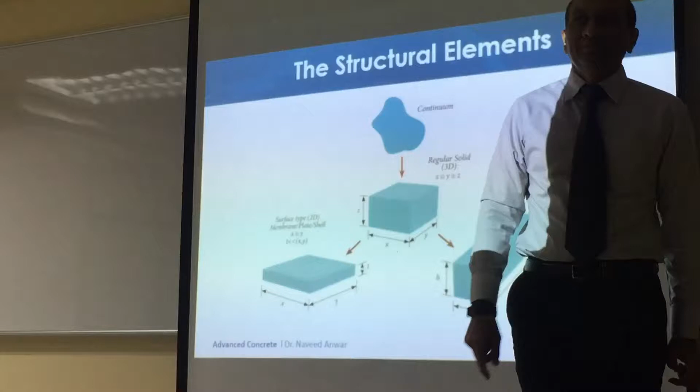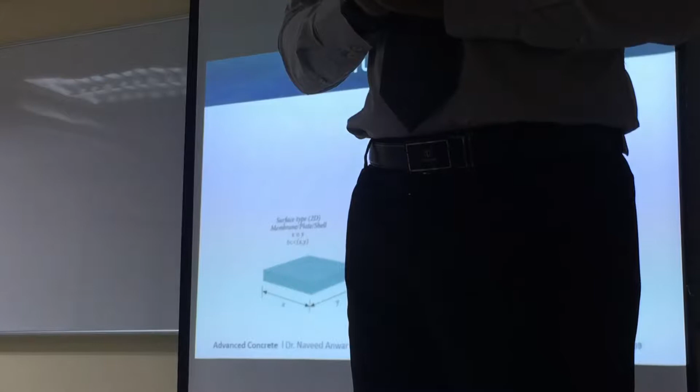What is a continuum? I am not going to teach English in this course, right?

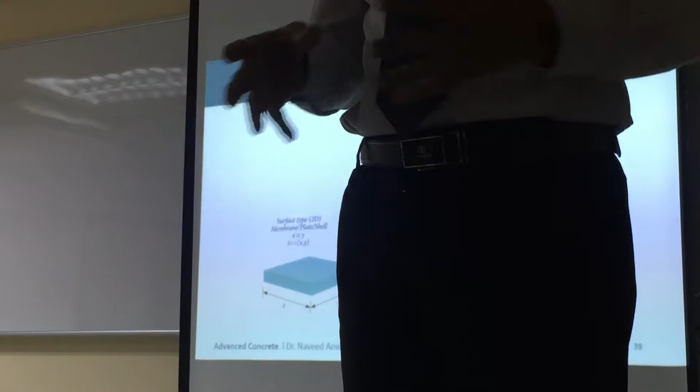Continuum means something that never ends. It just goes in all directions forever, in space and in time. Things that Einstein liked, right? Things that are continuous and they never end, both in time and space.

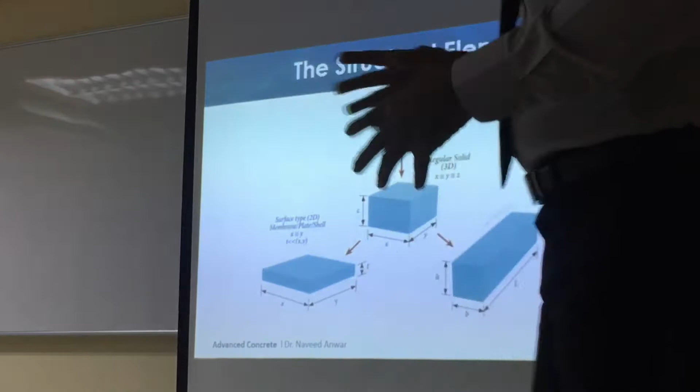So if there's a continuum, we are part of a continuum. We are all part of a big time and space continuum. There is no distinction between space and time. We have learned it's all part of the same thing. Energy, matter is the same thing, right?

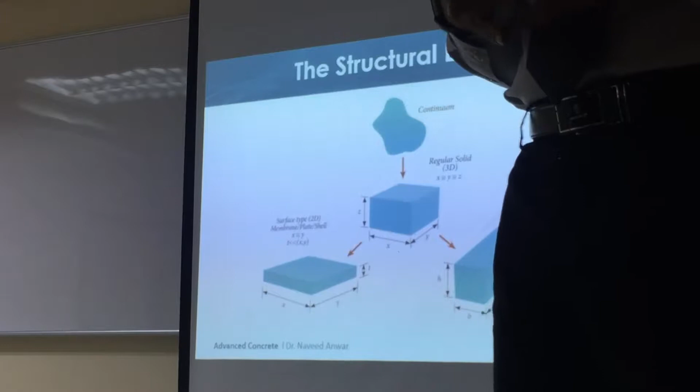So you're just part of that. Everything is part of that. But if we break that down and take out a solid, regular piece out of that continuum, physical, at one instant of time, and then we say, okay, this is a solid that I'm going to deal with.

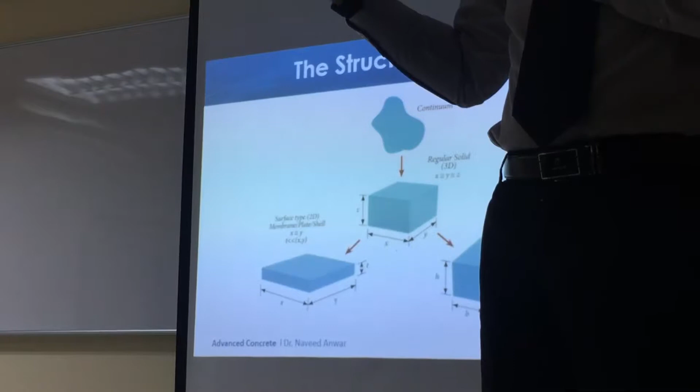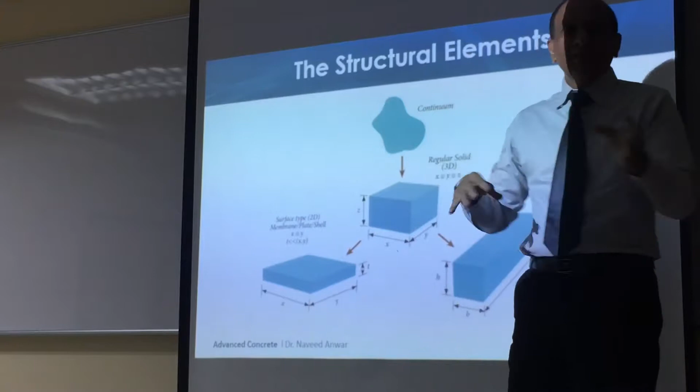This is a block of ice or block of something that you take out. That block of wood or ice or concrete, whatever you take, it's a solid taken out from a continuum at a particular time. And you say, okay, I'm going to assign 3 dimensions to that, z, x and y. Doesn't matter, x, y and z, 3 dimensions to this one.

And then if I say that all 3, x, y and z are nearly the same order, then I'm going to call it a solid.

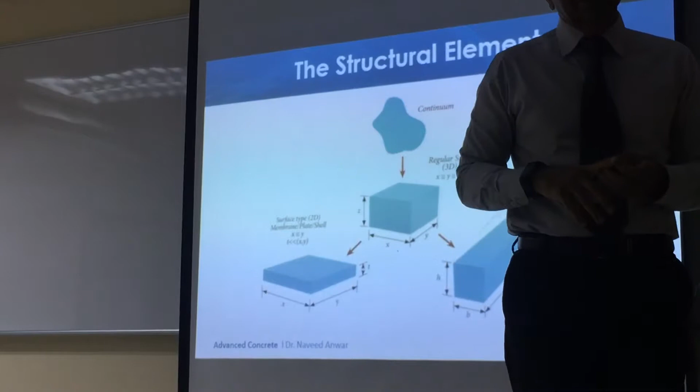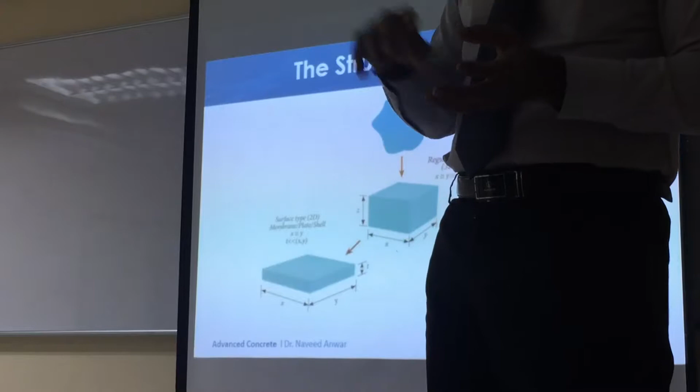And the theories that govern solids are different from other theories that we will talk about, right? So there's a whole field called solid mechanics that we don't teach in AIT anymore. I used to study it, my professor was very, very tough at that time. I hardly passed that course. Very tough course, solid mechanics, because it dealt with continuums.

Now we don't teach it because of the computers. We think that knowledge is not so essential anymore, right? So we don't teach that. Many universities don't teach that course anymore.

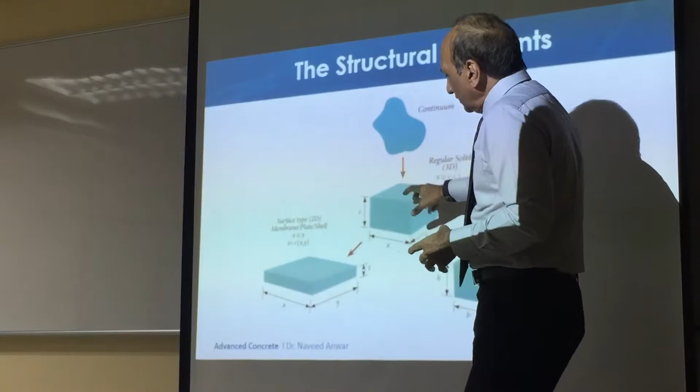So solid mechanics, or solid, then if you go to this side and you say that one of the 3 dimensions is much smaller than the other 2 dimensions, we can call this a surface type or 2D object. This is 3D because all 3 dimensions are important. Here it's called 2D because 2 dimensions are important. The 3rd dimension is very small, so we can convert that into a property called thickness.

And then whether that thickness is 1 centimeter or 5 centimeters, it doesn't matter, it is still surface. This computer is called Surface, you know. Microsoft came up with a very nice name for this one. I really like it, they call it Surface. So because its thickness is so small compared to the other dimensions, they call it surface. And that's what we're saying, surface type 2D object, right?

When the thickness is much smaller than the other 2, how much smaller? We don't know. It's a big debate. What does it mean? Relative, but what does it mean, how much smaller? 5 times, 2 times, 3 times, 4 times? We can discuss a lot on this one. We will discuss this later.

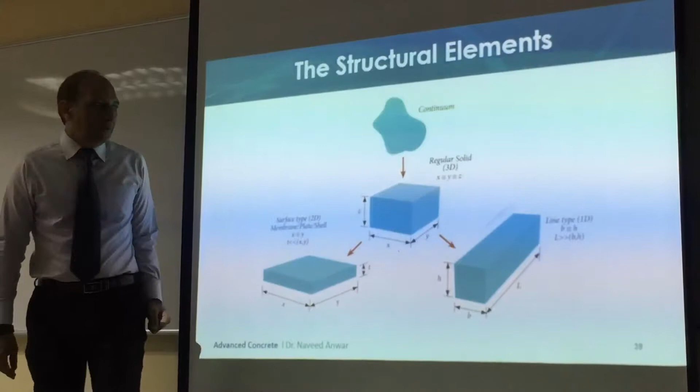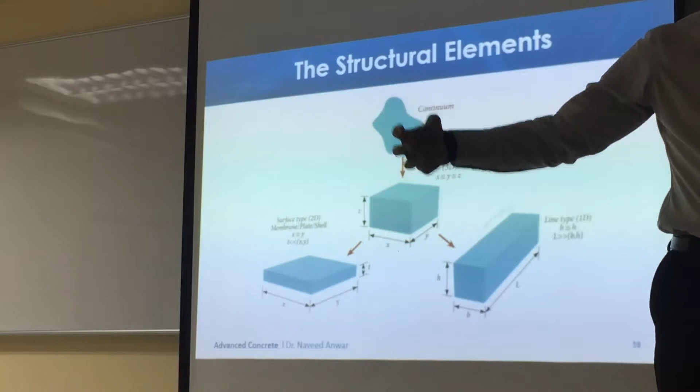But let's assume that this is one type where thickness is much smaller than the other 2. So this is one surface type. On the other side, if we say that 2 of the dimensions are much smaller than 1 dimension, then we come to the bar type, line type. And this is what is our main topic for this course.

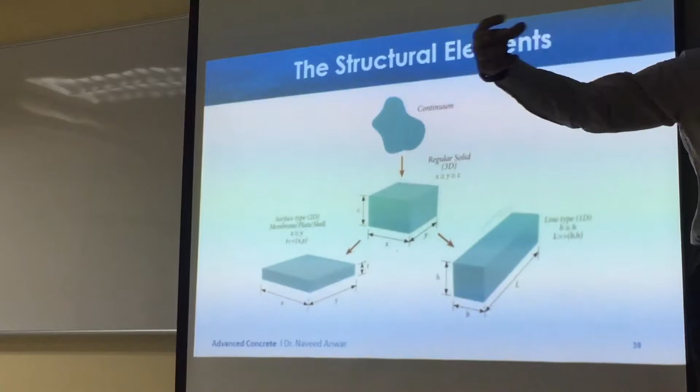Line type elements, in which 1 dimension is much longer than... can I borrow your phone and your pen? Yes, please, I will return, promise.

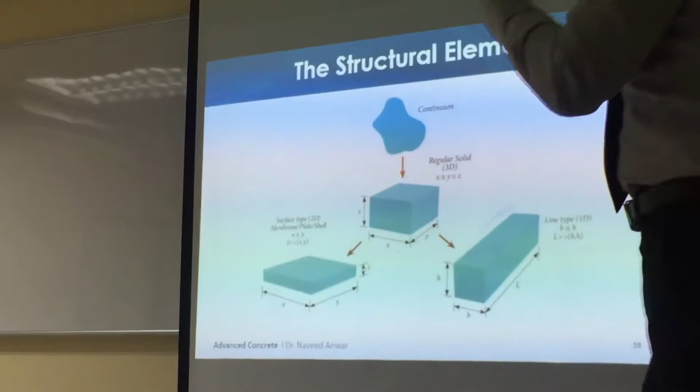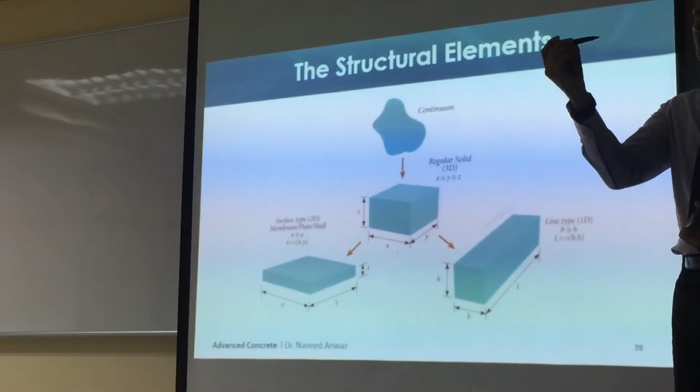This is category number 1, surface type. 2 dimensions are big, thickness is very small. This is category number 2, line type because the cross section is much smaller than the length, right? So this is line type element, that is a surface type element.

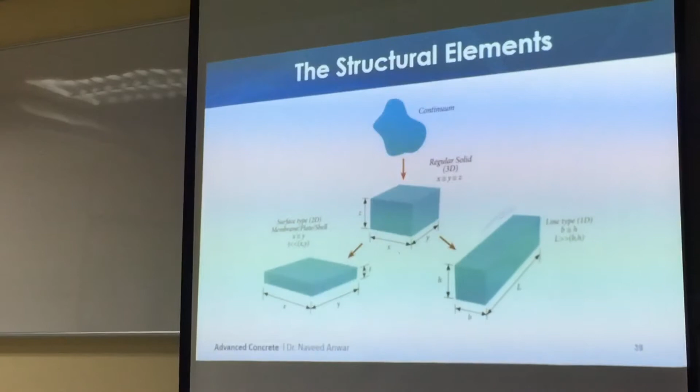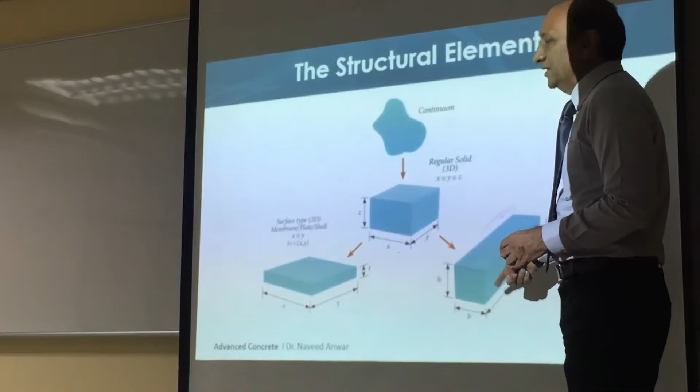And if I can borrow this one, or I will not borrow, this is a cube or a block type element, in which 3 dimensions are nearly similar. So you can see from here that the theories designed are totally different for these types. We are going to start our study with this one, then we will go to that one, and then that one, in that order.

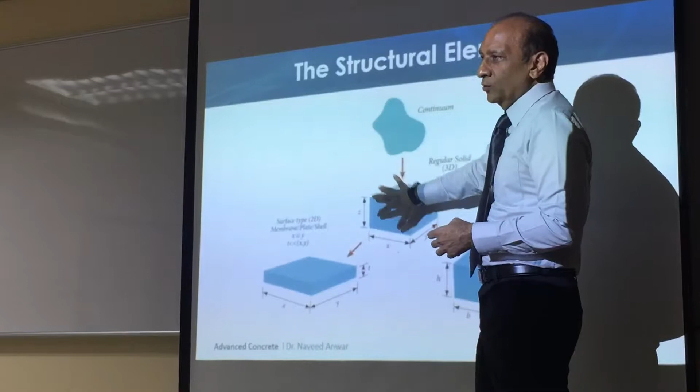Okay? Solid mechanics people start from here. In fact, they start from here, they go this way, and then they go this way. Now we will go the other way, right?

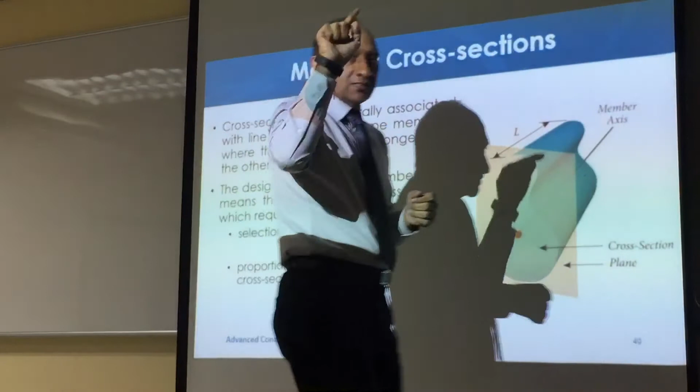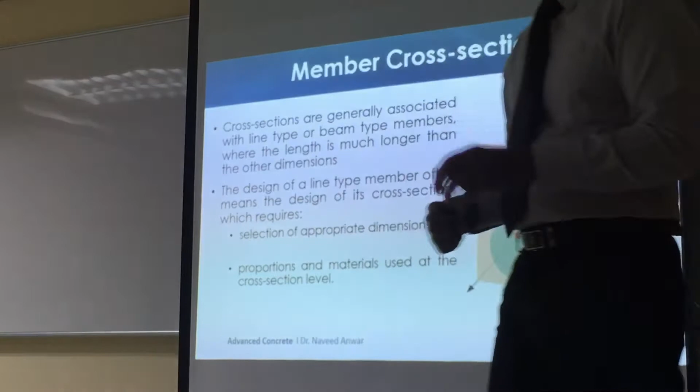Let's talk about a bar type of element like the pen that I showed you. If you take that and cut it across, you will see the circle, or the cross section of that item. So if I take a bar type, let's say the leg of this table, this pipe, and then I cut it, I will see the cross section of that pipe. Or if it's a straw, if I cut it, I will see a circular hollow section there. So that is called the cross section.

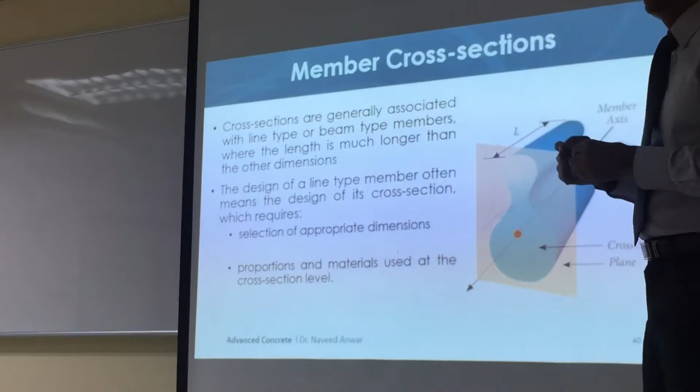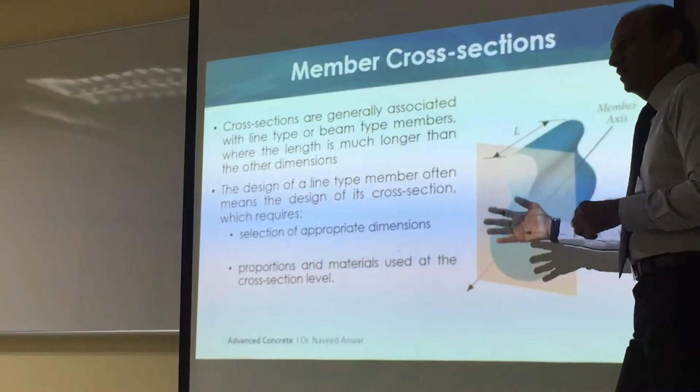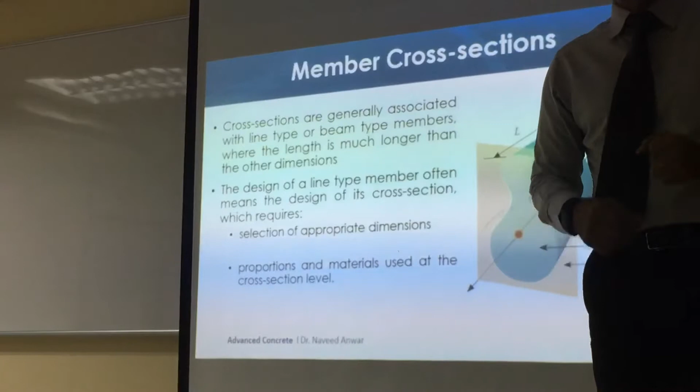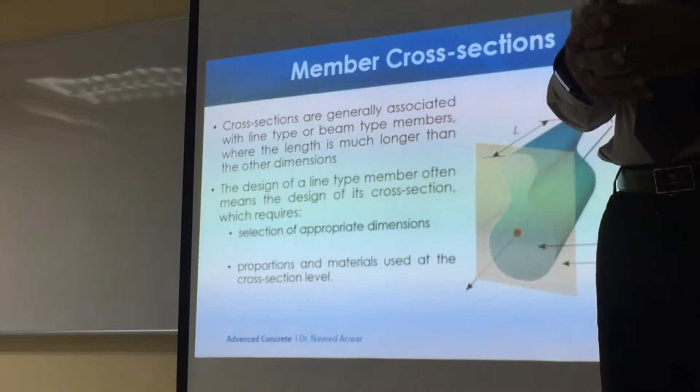The cross section will be exposed if I cut it at any location. So if we take a plane and cut a line element, we will expose the cross section. This is the cross section of that line, a general cross section, and that is our first topic: understanding the cross sections of the line type member, because everything comes from this onward. That's why this book is called structural cross sections, because it's so important to study this, because it will give us understanding of the members and go beyond that.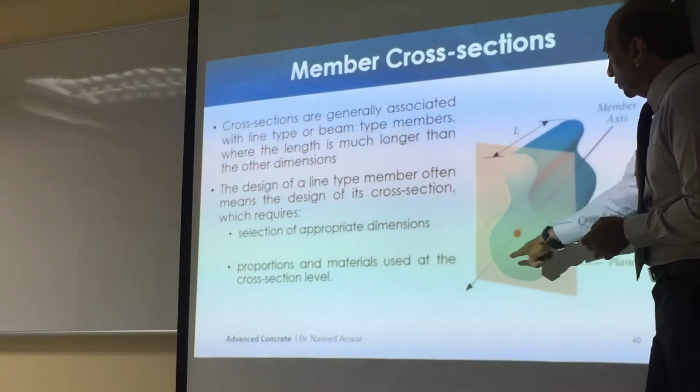So when we cut this one, there's a center line, a length, and a cross section, and this is our first focus to understand cross section. This could be a beam, this could be a column, this could be a cable, this could be anything. This could even be a footing, it could be a truss member, it could be steel, concrete, aluminium, a sugar cane. Why not? You cut a sugar cane, you see a cross section.

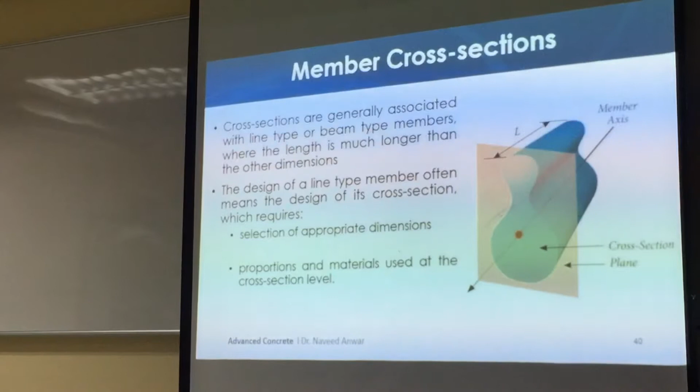When you cut a cross section, you expose the material, then you can see what it's made from. For example, if I just show you this one, you're not sure what it is made from inside, but if I cut it, you can see the cross section. You can also see that it is made from plastic. Or unlike a sugar cane, where the outside looks very solid and strong, if you cut it, you will find that the solid part is only very thin, and inside the pulp is very soft.

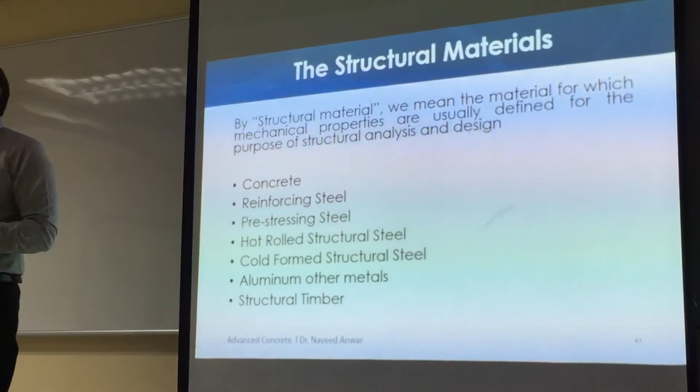So when we cut, we expose the cross section, and then we look at the material in the cross section. We have to understand the material, then we will understand the cross section, then we will understand the member, then we will understand the structure. So everything starts with material, then we go upward, understanding everything. If we understand material, we will understand cross section. If we understand cross section, we will understand the member. If we understand member, we will go and understand the structure.

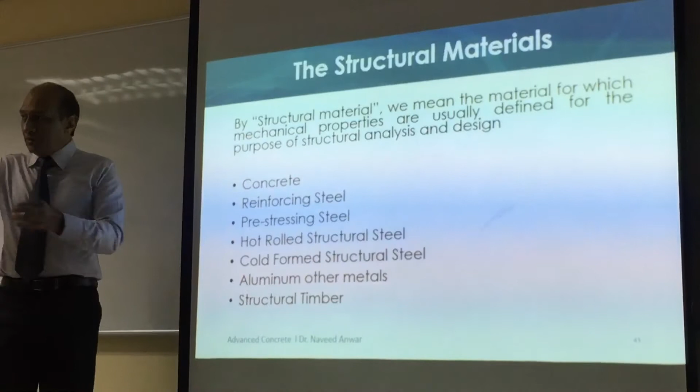We can have the material inside: concrete, reinforced steel, pre-stressed steel, hot rolled sections, cold formed sections, aluminium, timber, and many other materials. So when you cut a structural cross section, you will find that it is made up of any of these materials, or a combination of materials.

Or bamboo, why not? People use bamboo as a structural material a lot. So bamboo is just as good as concrete or steel. For us, it doesn't matter. We really don't care what material it is, we just want the material.

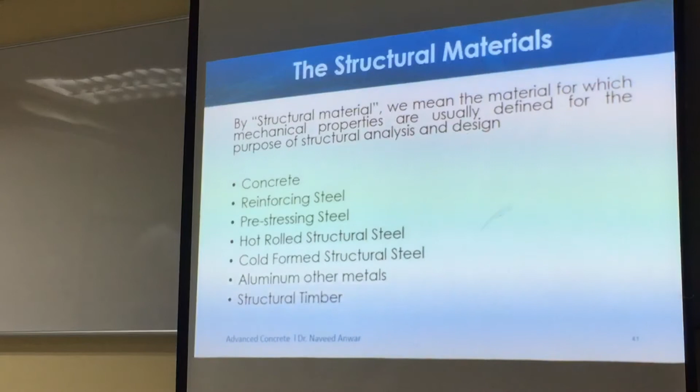Now let me go to completely the other side of the problem. So that's one side, we're talking about one member. How does this member get its forces? What makes it act or react in a certain way? What are we interested in? Why do we need to study the material? Nobody asked me, right? You should ask me, why? What's the problem here?

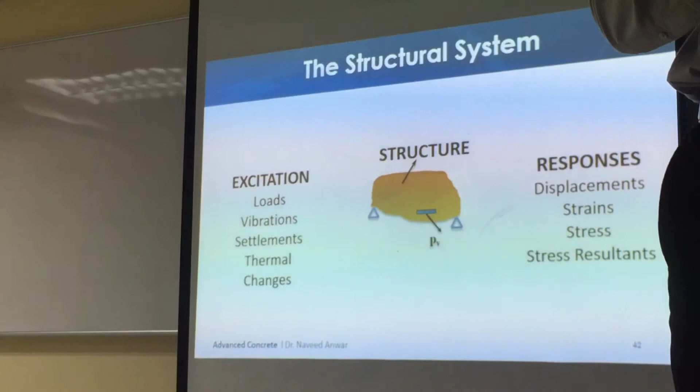It needs to take some loads, correct, so it needs to resist something, it needs to carry some load. Because if I take your pen, can I borrow it? If I try to break it, then it is important to know what it is made of. If it is made from steel, I will not be able to break it easily. If I take the straw, I can bend it; another, I will not be able to bend it. So that means there is something in that cross section and material that is changing its ability to resist applied forces, and we want to understand that.

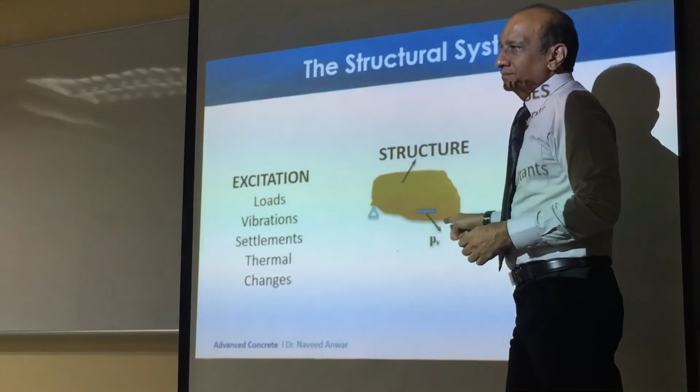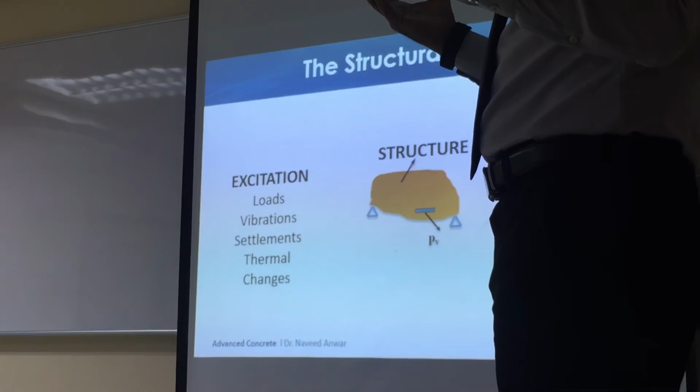Now, where is that coming from? On the other side, let's take again a continuum, a structure which has no form. A general structure could be a bottle, could be a table, could be my shoe, could be anything, or even a cloud, as soft as a cloud. It doesn't matter. And normally, every type of structure is subjected to excitations. Excitations means it is always excited, always moving, always being disturbed. It's never at rest, the poor structures can never sleep.

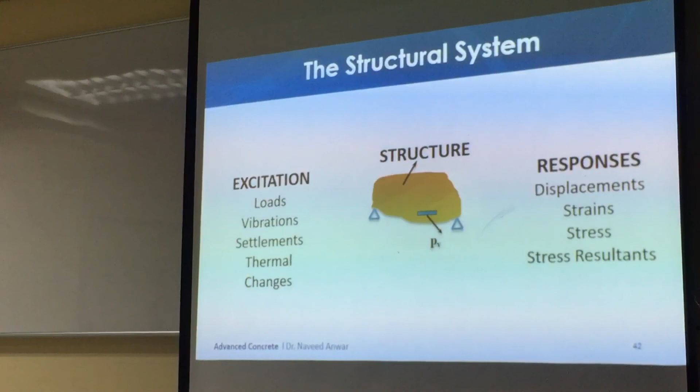Why? Because something is always disturbing them. They are disturbed by themselves, call it self, that's okay, but there's also another thing called...